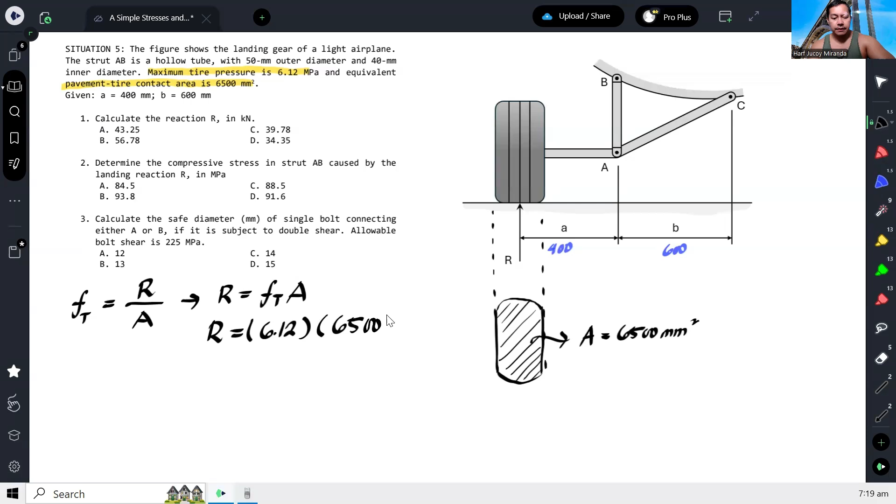So we can solve for the force by multiplying the stress and the area. The force R will be equal to 6.12 megapascals multiplied by area, which is 6,500. Take note this is in megapascal, so this is Newton per millimeter squared, and this is in millimeter squared, so they cancel and our answer here will be in Newton.

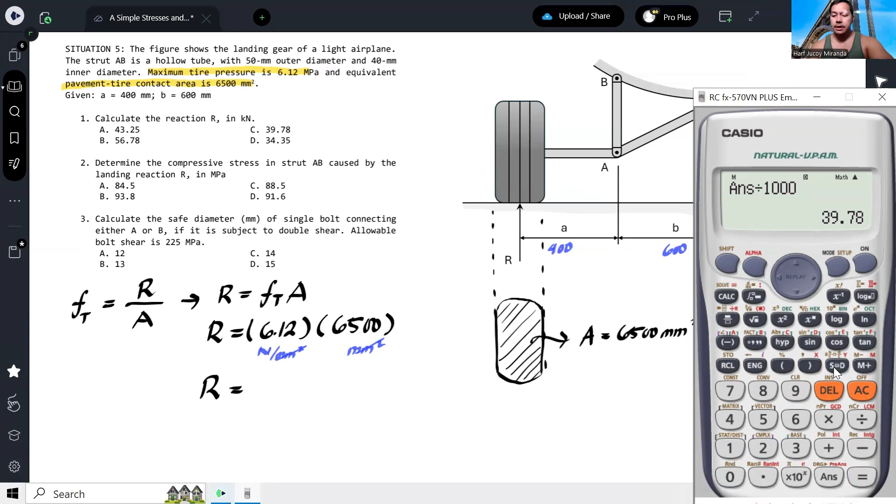So calculating R, we will have 6.12 times 6,500, divided by 1,000 to make it kilonewton since that is required in the problem. So that's 39.78 kilonewtons. So that would be our answer for number 1.

Next, determine the compressive stress in strut AB. To calculate the compressive stress in strut AB, we need to know the reaction on AB or the force acting on AB. To calculate that, we can take this structure.

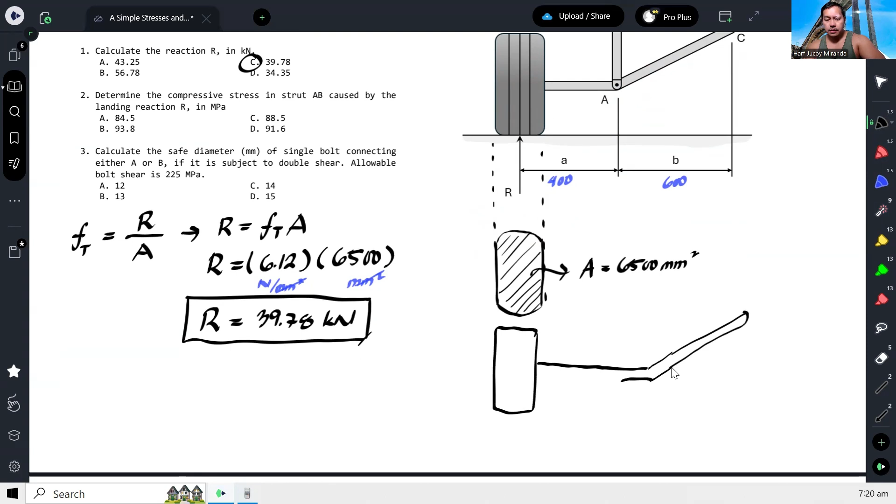This structure is subject to this force. As you can see, it's connected here, so there's a reaction here. Let me just redraw it to make it clear. I'll take this structure, including the wheel. This structure is supported by a pin here and a pin here.

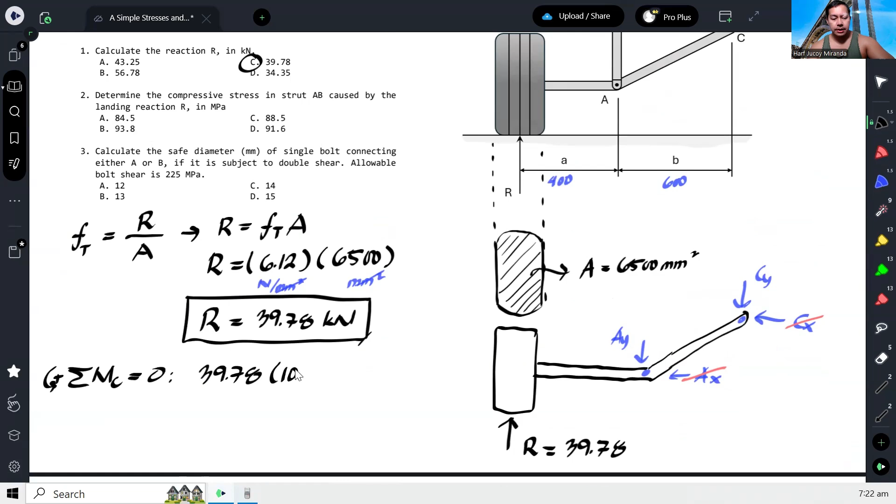The rotation it will produce about C is clockwise, so let's set this as negative. And then our AY, multiplied by its moment arm from C which is 600, the rotation it will produce will be counterclockwise, so this will be plus. And this is all equal to 0.

From here, we can solve for AY, which is also the force in the strut. So that is times 1,000, then we divide by 600. So that gives us 66.3 kilonewtons.

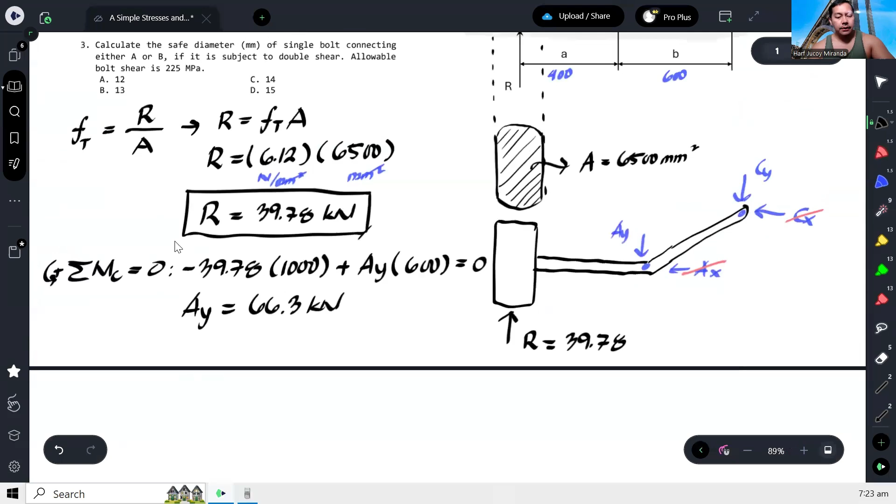Now to calculate the stress in strut AB, what does strut AB look like? The strut AB, according to the problem, is a hollow tube, so it looks like this. The diameter is 50 for the outer, 40 for the inner. So this is 50, and then this is 40.

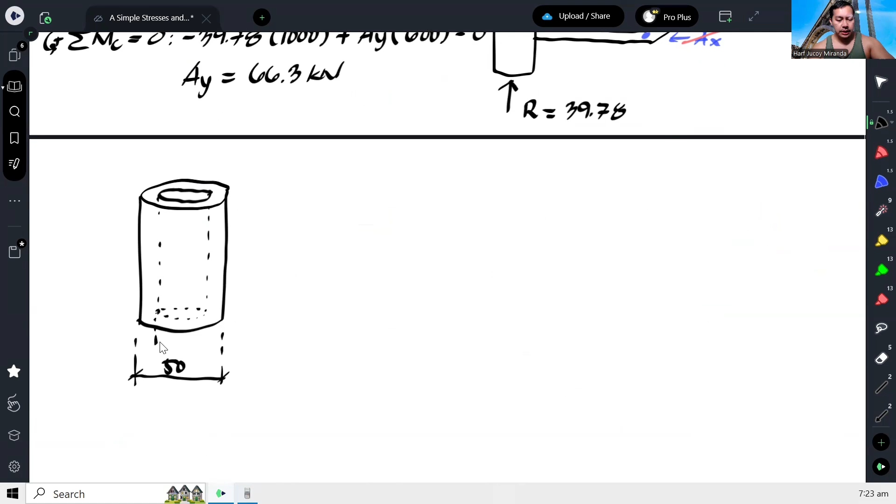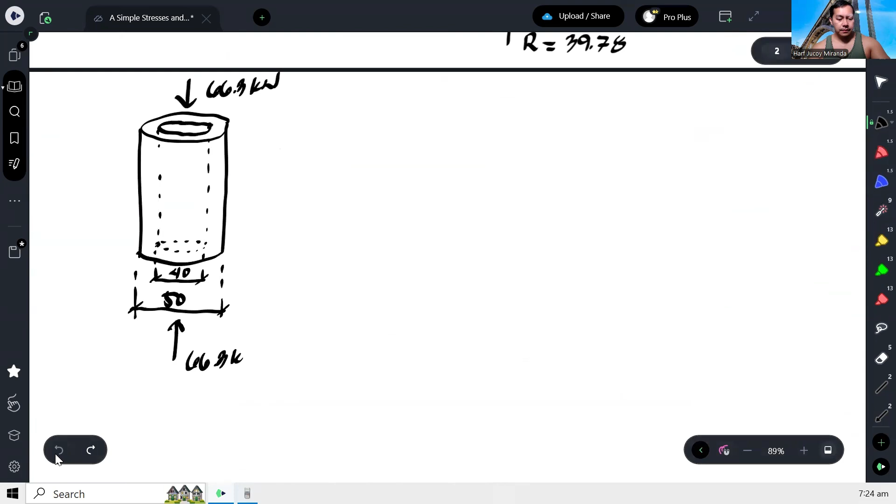So the area that will resist this force, there's an applied force, which is AY, on both ends, so there's also one on the other side for balance. The area that will resist that is just this part here.

Therefore, the stress, which is a normal stress for AB, is equal to the applied force, 66.3, let's make it Newton, divided by area. The area is the area of the big circle minus the area of the hollow circle. So that's pi over 4 times the outer diameter, 50 squared, minus 40 squared.

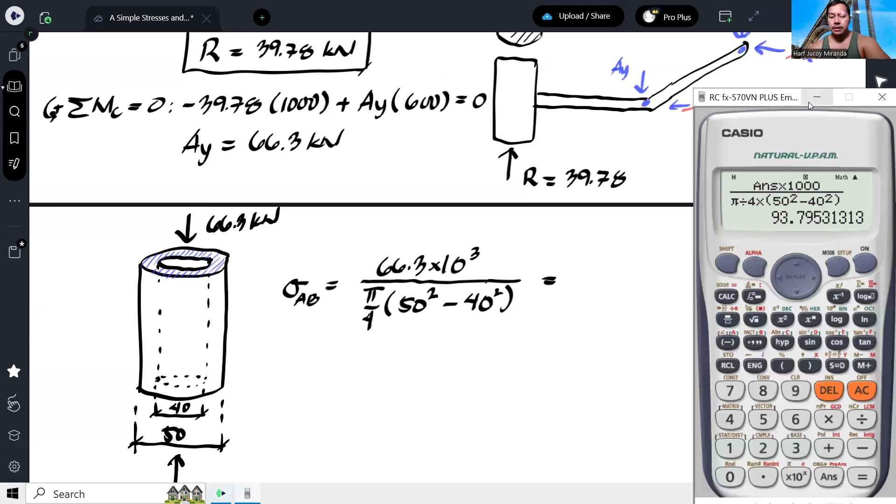So therefore the stress will be calculated as pi over 4 times 50 squared minus 40 squared, which gives us 93.8 megapascals. So in our choices, that's letter B.

Next, calculate the safe diameter of a single bolt connecting either A or B. What's the safe diameter of the bolt here? Given the allowable bolt shear stress to be 225 megapascals. To calculate that, we do it the same way, we will look at this same strut.

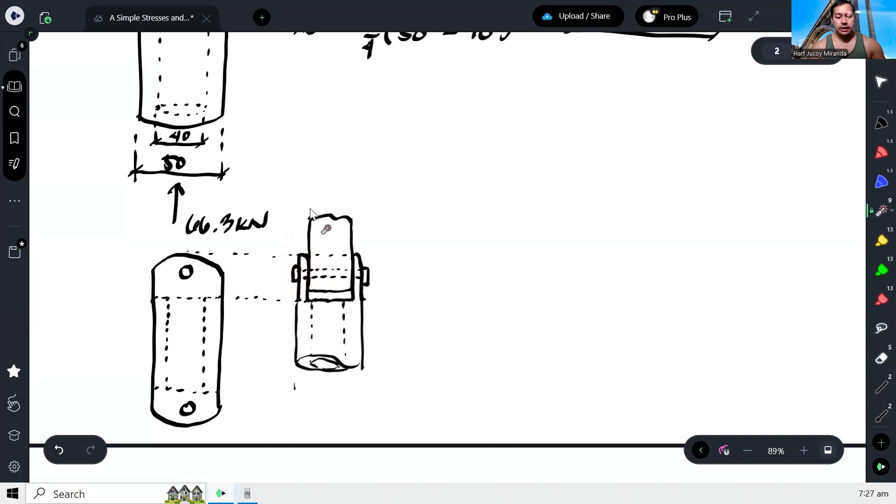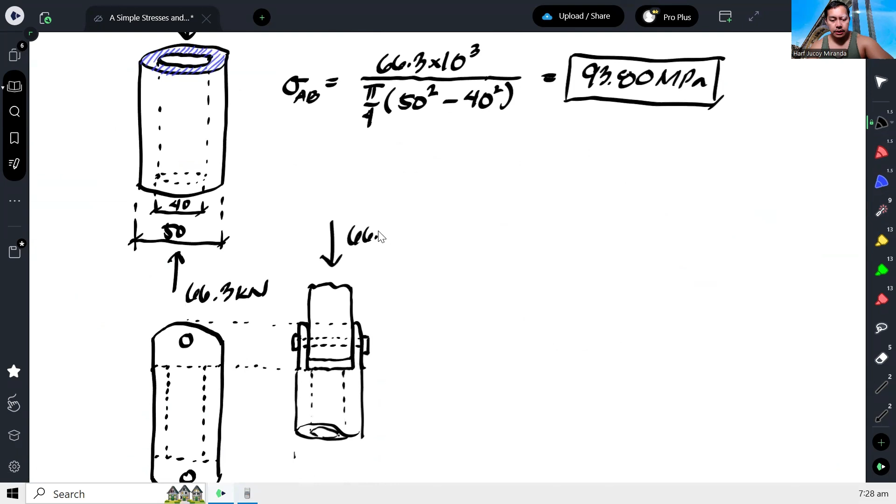Anyway, to calculate, we know that the applied force here is still 66.3 kilonewtons. So that 66.3 is what this bolt needs to resist.

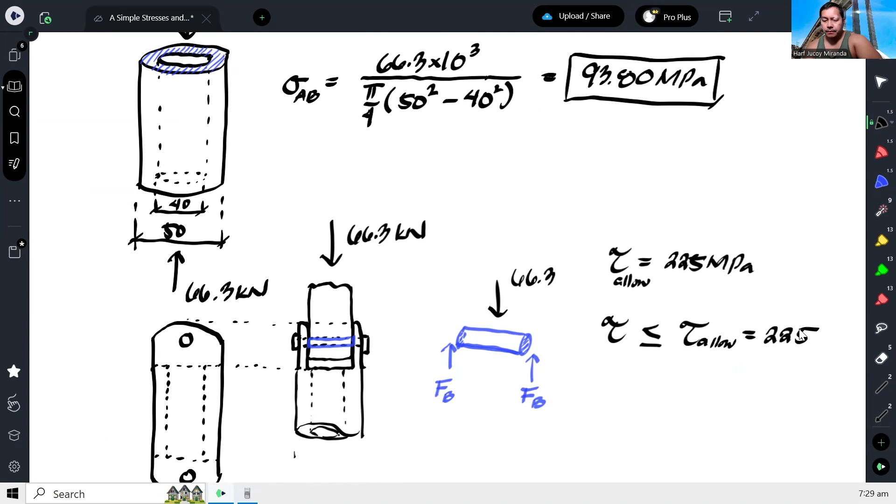So what's the actual shear stress? Isn't it force divided by area? So FB divided by area. But our area, since there are two of them, our area is also doubled. So that this should not exceed 225 megapascals.

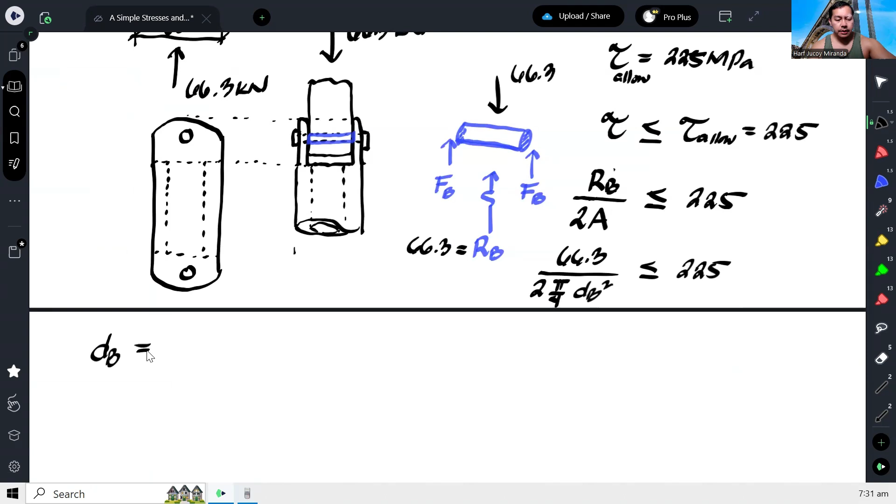squared, should not exceed 225. Alright, so therefore, the diameter of the bolt can be calculated. Gawin lang muna, ang mangyayari dyan, cross-multiply mo doon, tapos divide mo dito. Kaya mangyayari, technically hindi ito equal, kundi this should be greater than or equal. Kasi ito, maging cross-multiply mo doon, dB na yan, dB squared, tapos naka-greater than or equal na siya dun sa kaliwa.

Kaya pag binaliktad, greater than or equal siya dito sa nasa kanan, at ang nasa kanan, ito mga to, kasama ito. So that would be 66.3 over 2 times pi over 4 times yung divide natin na 225. Kaya yan. However, this is in dB squared pa yan, ano? dB square root pa natin ito. Square root, so that's 0.433.

Sorry, ano pala to, meron akong na-miss out. This should be converted into newtons para maging same sa units na megapascal. So this should be times 1,000. Ulitin lang natin, sa kanina may kulang lang dito na times 1,000. Tapos, square root, that gives us around 13.7 millimeter. So ibig sabihin dito, yung diameter ng bolt should not be lower than 13.7 millimeter to be safe. Ibig sabihin, we can approximately consider 14 millimeters as our answer.

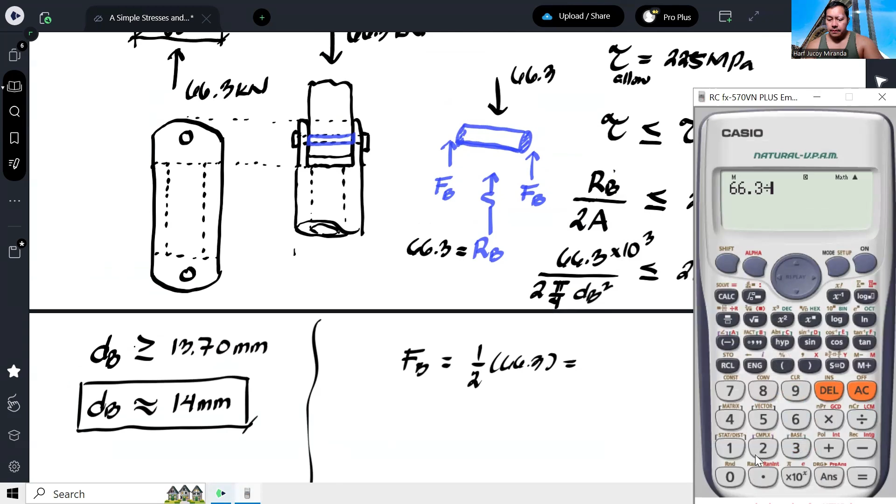Kaya lang, take note, isa lang din yung area na gagamitin natin. So bali, yung FB kasi ay kapag tinignan natin, it's just 1/2 ng 66.3. So that's gonna give us 33.15 kilonewtons.

Tapos, ganun ulit, yung actual shear stress, which is equal to FB over area ng bolt. Pero this time, yung area ng bolt, isa na lang kasi ito na lang yung pino-consider natin eh. Yung nasa right side lang. O rather, parang single shear na lang yung consider natin kasi yung force, hinati mo na sa dalawa. So that should not exceed still yung allowable na 225 megapascals.

Okay? And para malinaw, yung allowable shear stress, walang kinalaman yan kung single or double shear. Fix na yan, hindi yan di-divide ng 2 or i-multiply ng 2, no? Ang nagbabago lang is itong actual, depende kung ano yung kino-consider mo.

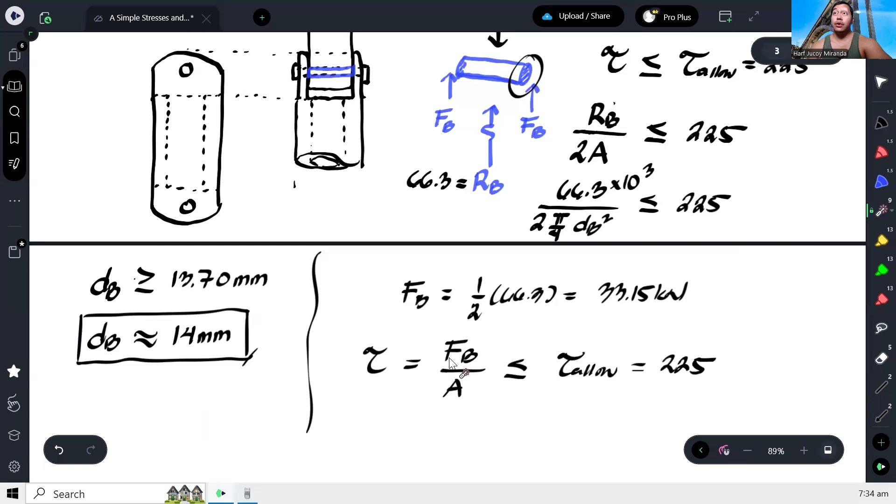So kung ganyan yung analysis mo, this will be 33.15, gawin nating times 1,000 para ulit maging newtons. Tapos yung area ng bolt, pi over 4, isa na lang, kasi isang side lang yung kino-consider natin. Diameter of the bolt squared should not exceed 225. Kapag kinompute mo ito, you should get the same answer.

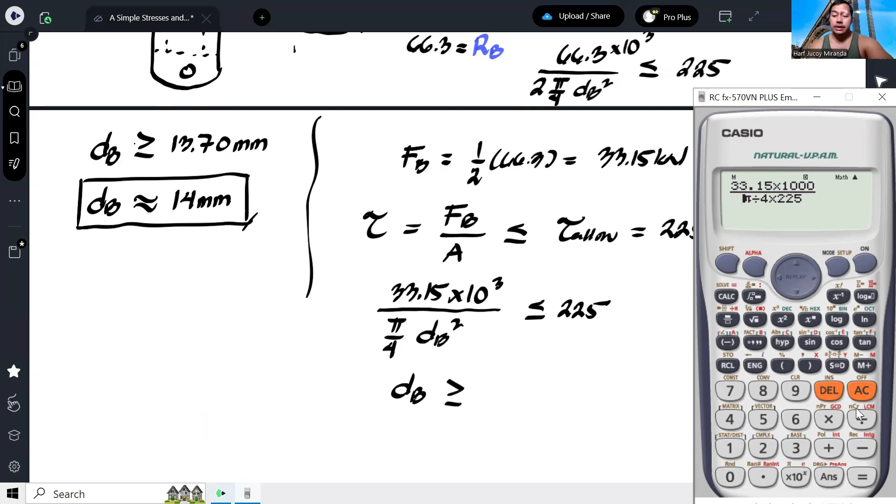So ganun ulit, greater than or equal, ito magiging 33.15. Tapos tatanggalin natin yung times 2 dito kasi single shear na lang siya. Tapos, take the square root. The answer is still 13.7. The diameter should be at least 13.7 millimeters, or we can round that up to 14 millimeters. Okay, so ito ay single shear analysis.

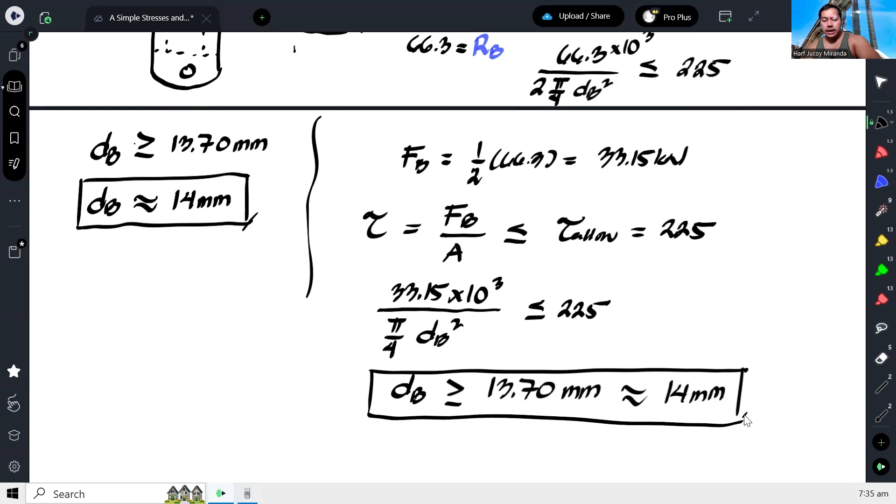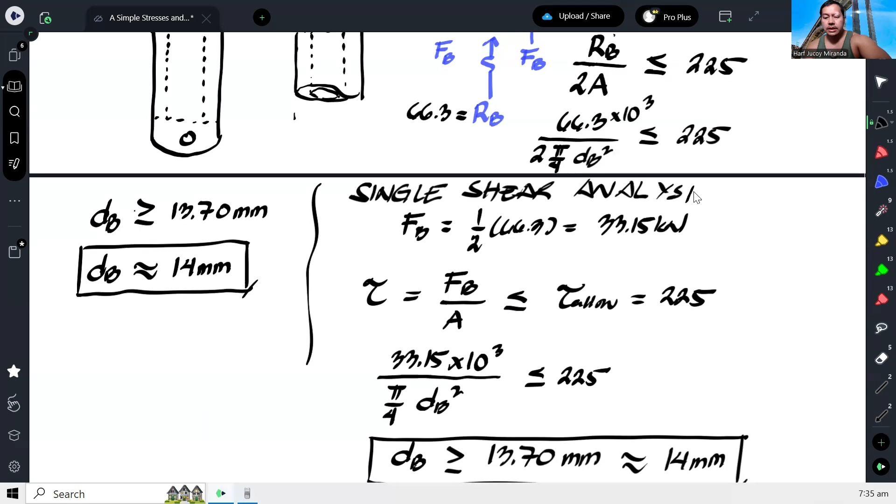Which is valid pa rin, basta alam natin kung ano yung kino-consider natin na side. Dito kasi kinonsider natin yung buo, kaya buo ito, pero yung area mo, dalawa yung kukontra eh. Pero kung ang consider mo lang, isa lang, single shear, ang kukontra lang din na area, isa lang din. Alright, so hopefully malinaw yun.